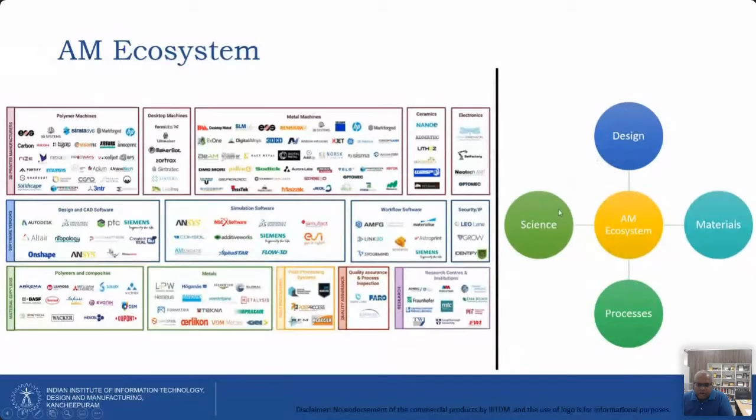Okay, so this is about additive manufacturing. I told about my institute, and then what I do, and then in general what the world is doing and what the commercial things and universities are doing, and then what the research ecosystem is and what the commercial ecosystem is.

Now, so we are changing gears. I want to tell you a bit about the fourth industrial revolution, and then go back to additive manufacturing and design for additive manufacturing in detail.

Okay, so now I think I should read this quote, which I use largely in many lectures, which is called 'adapt or perish, now as ever, is nature's inexorable imperative.' What H.G. Wells tells us in this quote is, if you're not adapting to changing market conditions and changing technology, we may be doomed.

For example, when we studied, we had a planer and a shaper, which are typically non-rotating workpiece and non-rotating tools, so they come into the group 4 category of machine tools. Now they are extinct, I would say, because none of the workshops have them - if they are not adapting to new modern technology like CNCs, turn-mill centers, and CNC controlled forming equipment. So you see this guy is sleeping here, because he is not able to adapt, and he has lost all the jobs because he has not modernized his plant, and has not looked at capacity building or moving to what the industry needs.

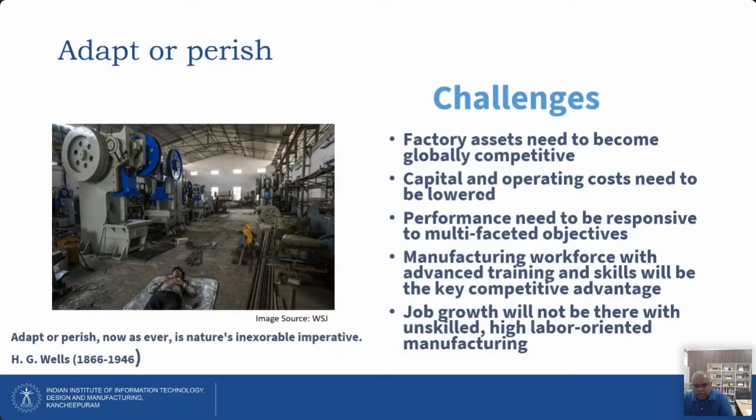As I said, the factory assets have become extremely important to be competitive, so it's become globally competitive. Chinese manufacturers are becoming extremely redundant right now because of COVID and other situations, so it becomes imperative for them to adopt fast-changing fields and things like that. These are some of the challenges. People are also looking at extremely lower cost and higher quality products at a reasonable time for them to develop and launch into the market. The Chinese are doing that extremely well, and we have to catch up with them - so the capital and operating cost needs to be lowered.

So Industry 4.0 actually helps many industries. If you put them in a 4-quadrant view, there are high potential industries - they could employ Industry 4.0 technologies and are positioned well for the future. And there are strong current bases, like very leading industries, GE, Siemens and Bosch. These companies are first movers, adopting fourth industrial revolution technology very quickly into manufacturing shop floors, the production process, the life cycle, and the supply chain. So they are able to come up with a really good amount of knowledge, skills, know-how, patents and technologies, so they can sell it to the worldwide market.

So they can export it to India and things like this. We are also trying to do a lot of things, but still we are at legacy systems. We are at very high risk for the future because we have a very strong current base, but the problem is we are only with the legacy systems. We are still trying to understand the micro aspects of the manufacturing process, and we are not yet ready to adapt to some of the things that actually need to be adapted.

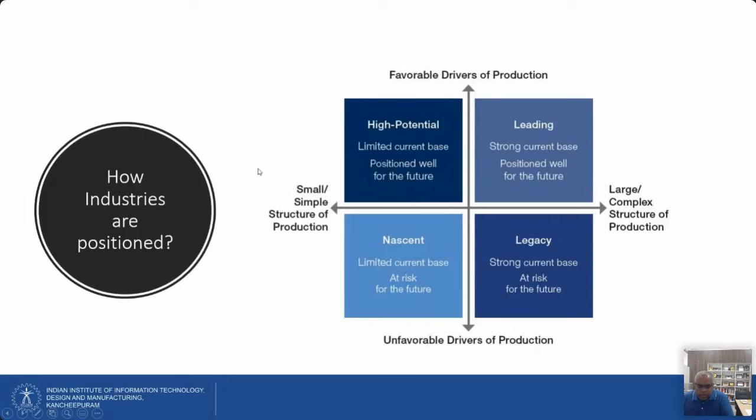So this is called the capability maturity model, to understand how industries are positioned. I quickly tell you about what is happening around the world in the fourth industrial revolution. So for example, look at manufacturing.

When I was working at NIST, which is the National Institute of Standards and Technology, around 2012-13 timeframe, that is when the Industry 4.0 document was released by the German government. It's spelled in a different way, INDUSTRIE, because it's a German-driven thing. The German Chancellor Angela Merkel announced the policy.

It's a German government policy to basically adopt a few technologies and then reach a convergence, so that they can achieve very high productivity and very low cost of operations, and also very high skilled labor can be done. So that's what they wanted basically.

The major reason or motivation for them to work on such a fourth industrial revolution is that they have a very aging population. That means they had a huge population who are somewhere in their 60s and 70s. They're not ready to work in the factories, so they have very high labor shortages. So they wanted very high automation in these factories.

Whereas countries like India, we have a very young population. Our demographics are very young. So we have a huge number of people who are jobless. We need to get them into jobs. But the problem is...

with the low skill jobs that we are generating, like Ubers, like Olas, and like Swiggy's, Zomatos, they are very low skilled, right? So we need to generate very high skilled jobs, because highly labor-oriented, low skilled jobs are not going to stay for long, right?

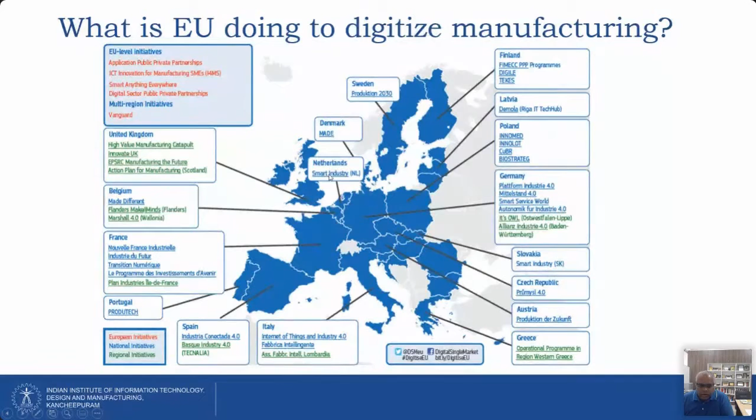So these are some of the other countries, like the European Union in general, and individually countries have separate things, like Demola and Produktion 2030, made in Denmark, and smart industry in Holland, and things like that. So you have a lot of things happening there.

So we call this a manufacturing renaissance, because I think there are some technologies which are called evolutionary, as they take 30 years of time to grow. For example, computers: the first computer was built in 1960, and now I think every home has at least 3 computers right now, as of now.

So on average, people have 3 computing devices in a home. Some homes don't have a computer, but still, on average, if I look at it, 3 computers, considering the mobile as a computing device.

So that is the growth. It has taken something like 60 years to evolve. But whereas some technologies are revolutionary, that means they progress at a much faster speed and faster adoption.

Like 3D printing, 30 years ago it was invented. Now if I look at US, every household wants to have one 3D printer in the home, and they want to personalize the manufacturing and make it distributed instead of making something in China, shipping it, storing it in warehouses, and distributing through logistics into retail stores to the customers. So what they want to do is make their own parts in their backyard. That has become one revolution in US. That's why it's called revolutionary, not evolutionary technology.

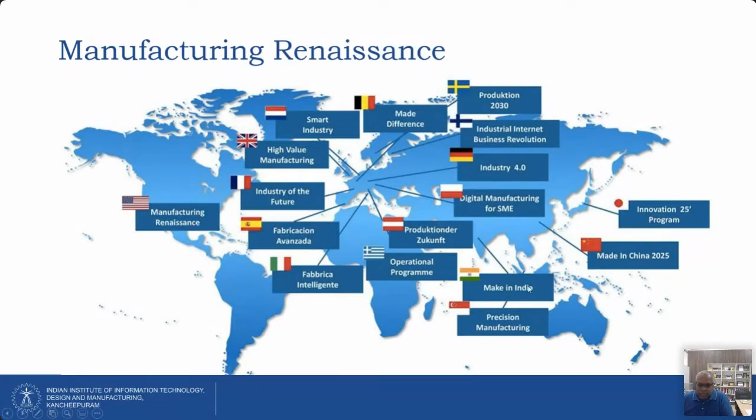So India is also doing a bit in Make in India and other things. But the problem with India is our manufacturing industry is extremely diverse. We have people making things in a small scale, extremely manual and laborious, like leather industry and cottage industries like potteries. And we also have moderate SMEs, like manual assemblies, and Ford and BMW which is completely manual.

But the problem is whether Industry 4.0 can be applied in all the industries in India. It's not going to be a viable solution. So we need some places to start somewhere in the first industrial revolution itself, then slowly move to the second industrial revolution, and then some places it's not even IT automated, so third industrial revolution, and then come to fourth industrial revolution. So we have all the industrial revolutions to reach.

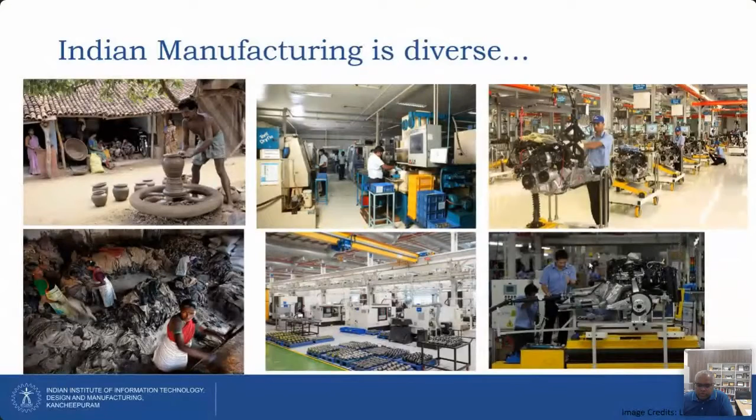So Internet of Things - I think many of you might be knowing what is IoT. I don't have to go in detail into all these platform technologies. Smart manufacturing or Industry 4.0 is nothing but the convergence of all these technologies, like advanced simulation. I'll tell the characteristics of this.

So what happens is there's a business driver. If I look at the adoption of Industry 4.0 in industries, because of plant-wide visibility and automation that is to be happening, there should also be a shift from reactive to predictive maintenance. So what is happening currently in most industries is they are using reactive maintenance strategies - don't fix it until it's broke. That's the policy they follow.

Now what is happening is you are able to instrument some sensors and then collect data and transmit it over network and put it in the cloud and use some analytical services to carry out data analytics and get meaningful actionable intelligence from the data, then use your wisdom and drive your production performance. So that's the kind of thing that Industry 4.0 envisions, right?

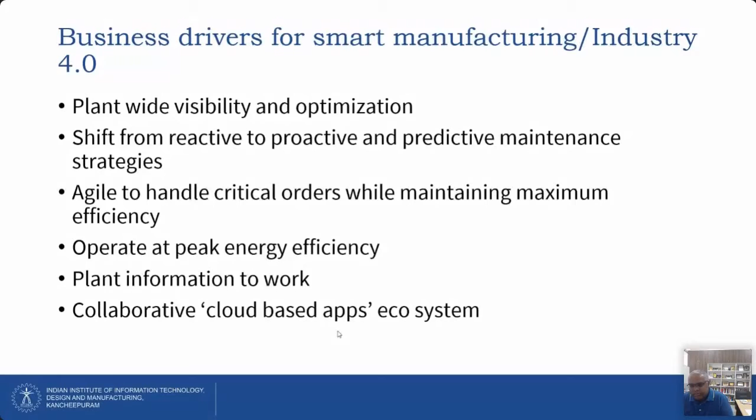And right now you have a lot of things available over cloud. Earlier you needed to have many things in-house. Now you can do many things through a cloud-based app ecosystem. So a lot of things can be servitized through cloud - either platform as a service, infrastructure as a service, software as a service, or machine as a service, things like that.

So this slide is where I'm going to explain the connection between 3D printing and Industry 4.0. What is the connection, and why is 3D printing becoming such an important technology? I have been talking about this for a while in many talks, and I'll try to explain it here in a detailed way.

So in the 1850s, as I was talking about, the first industrial revolution was about mechanization. People were trying to make craft productions - they have been making cars, ships, and planes. So what they were doing from 1850 to 1900s was initially making it in a craft stage - building a product, one piece at a time.

Then when the Ford Model T was launched, it was the first car to be mass produced. So what is mass production? I think you all know - it is about having a very high volume. Volume means the number of cars getting produced, or the quantity, you can say. So very high volume manufacturing.

So how do they achieve the volume? Through transfer lines - they have a moving transfer line. The line will be moving, and the workers have to assemble extremely fast so the product comes out. So in 7 minutes, a car can be manufactured - that's the total cycle time in the assembly shop. And that eliminated the need for craft production and things like that. But the problem is they've been using a lot of dies, like stamping dies, which are extremely expensive - the cost of the die is extremely high.

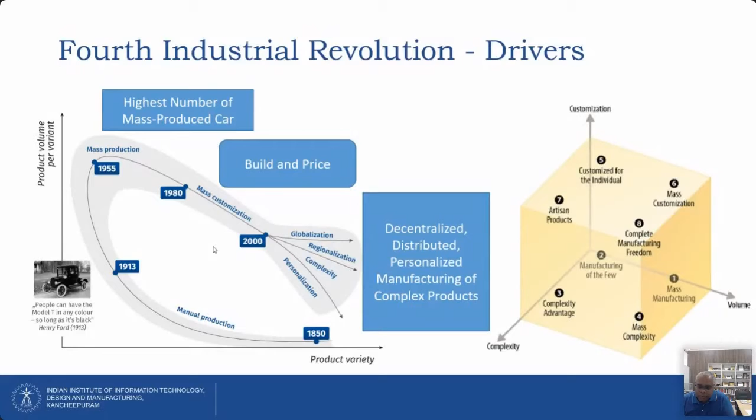But it has got its own challenges. In the title I said I'm going to discuss design opportunities and also challenges - I'm going to tell about the challenges towards the end. This is the one that I was trying to explain.

As I said, in additive manufacturing, the cost of manufacturing remains the same, irrespective of the complexity of the design. So let's say this is cost versus complexity - x-axis geometry complexity, y-axis cost. In conventional manufacturing like die casting, injection molding, machining, or even casting...

As the complexity of the part increases, sometimes the part cannot be withdrawn from the mold. You cannot have undercuts, you cannot have re-entrant features, and sometimes you have to give draft angles and maintain uniform wall thicknesses. Sometimes you need to maintain distance between features so it can be successfully die-cast. Conventional manufacturing technologies become extremely difficult when the complexity is slightly increased.

That's why designers use a principle called KISS - keep it simple, stupid. They want to keep everything simple. This problem is always there.

Like when you take any discipline in textile, the fashion designers may want so many things, but the textile engineer may not be able to produce that. Similarly, in civil engineering and architecture, architects want no beams, they want to make something so beautiful without beams, but you cannot support it. So people put beams here and there because structural engineers would find it extremely difficult to make it without them. So designers want a lot of freedom, but there are structural aspects, technical feasibility aspects, viability aspects, cost issues, which may restrict people who are in shop floor, manufacturing, builders, makers.

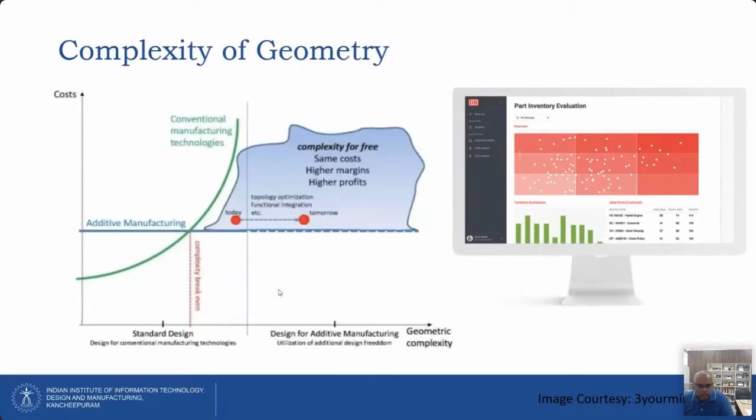Okay, so these are the tools and techniques. We have part consolidation, a technique where you take multiple parts and combine them into one part to take advantage of design simplification. And you also do lightweighting, where you introduce a lot of lattice structures so that you can lightweight the parts, because in many industries they want to cut cost as fuel cost increases, and there is pressure from government to increase fuel efficiency. So to make a car fuel efficient, you have to reduce its weight. One lightweighting strategy is to introduce lattice structures and do structural optimization for mobility solutions, especially automotives.

Heterogeneous modeling is about making multi-materials and gradient structures so that you can tailor functions in different regions, and also use generative design type principles to explore options. I'm going to show you, towards the end, an aerospace example of how you can use generative design. Generative design is an iterative process which gives you an optimized design, not just one solution, whereas in topology optimization you also optimize the material layout within a given design space, but you get only one solution. With generative design you get multiple solutions, and then you can optimize cost and other things based on those. You can also use artificial intelligence here; I will tell you about how people use deep generative networks and things like that.

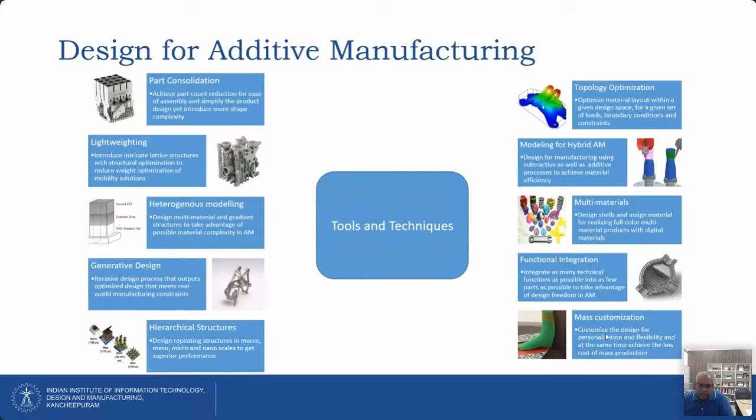For example, part consolidation, the first principle: you can take multiple parts that have too many fasteners and consolidate them into a bionic, bio-inspired design that's more nature-inspired and organic in shape. These designs are too complex to manufacture easily in conventional manufacturing, but in additive manufacturing it becomes much easier.

So that means you're using a divide and conquer approach. You take a very complex design and slice it, and when you slice it, you get layers of 2D contours. So essentially it's just 2D printing in the third dimension. Do you understand? That's why 3D printing itself is a misnomer. What people could simply call it is 2D printing in the third dimension. That is what's happening in many additive manufacturing processes.

Like this, you have sheet metal parts. You have to make a lot of these sheet metals and then microweld them together using ultrasonic welding, which is a painstakingly complex process. Instead, you can modify the design to make it one piece - these are called part consolidation.

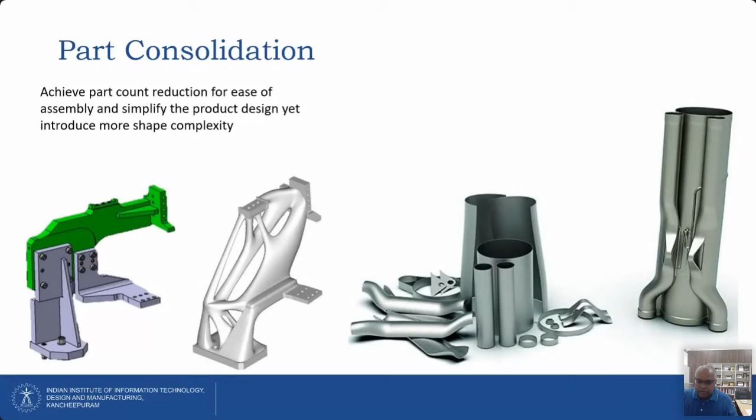But if you want to make a mold for this in conventional manufacturing, it would be extremely costly to make these shells. So what people normally do is put a plaster of Paris mold into the patient's ear. Let's say 100 patients come to an ENT specialist, so he can make 100 different designs customized to the individual patients.

Then overnight they can build these in powder bed fusion, a polymer machine. So 100 designs can be nested inside that build volume and made layer by layer at the same time, all of them different designs. You don't have to make 100 molds for 100 designs, isn't it? So that becomes extremely cheaper. This is what mass customization is about.

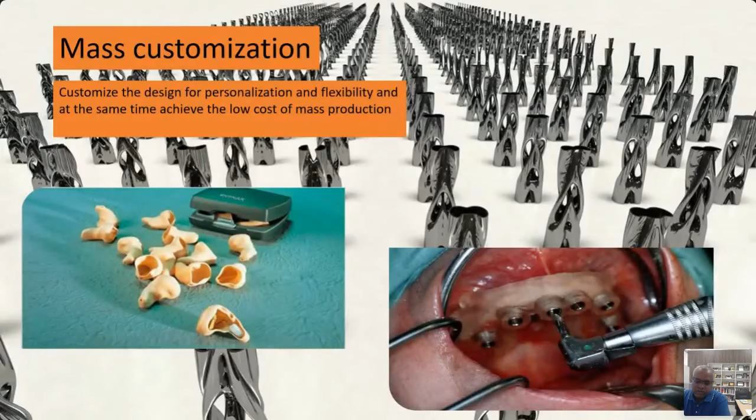So in this application you can make hundreds of the same varieties. This comes from medicine, and there are also applications in engineering which I haven't shown because it's very difficult to justify the cost. But there are some people who would like to spend money to get customized seats, customized parts, customized cars, customized mobile phone cases, and customized devices.

You can also tailor-make the structures, like having tailored porosities, bone-like structures. Internally you can have very high porous structures, and on the outer surface a very low porous structure, so that it mimics our bone. If you look at our bone, the cancellous bone, you can see the inner regions, like the marrow regions, are extremely porous, whereas when you move to the exterior surfaces it's extremely dense. So those kinds of properties you can actually model and then print.

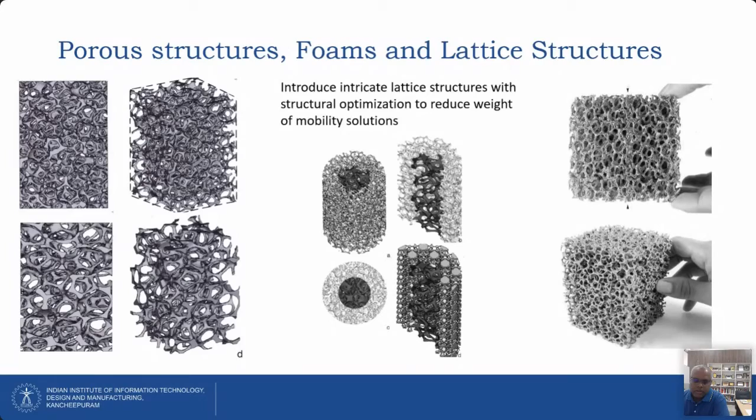This is ideally used in trucks, also earth movers, where you want to move the front arm or the back arm, the bucket excavators and things like that. So you want to control many things using one single hydraulic pump, and you may have to route that hydraulic flow into different cylinders - that's where you use a hydraulic manifold. These are typically large, heavy components. Now people are talking about efficiency, so they do a topology optimization.

They start with the design and eliminate the material which isn't doing this function. This has been designed in such a way because when people use a drilling machine, they can only drill straight holes - you cannot drill an inclined hole in a milling machine. So you can only drill a hole which is straight.

So that means you need to have a very solid block where it doesn't have any inclined or curved holes. In additive manufacturing, you can have any curved shaped holes. Also, this entire block need not be machined, so that's why you can optimize it and come to this point where it can be readily manufactured.

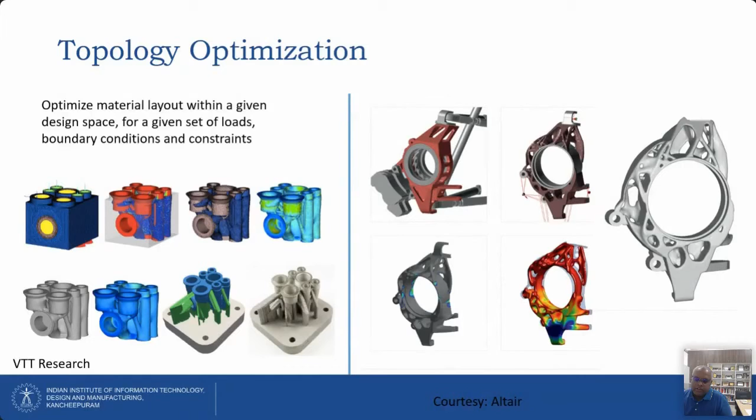So the steps are like this: you start with the frame like this, and then you optimize it. First, run an FEM simulation. You define a preserved geometry, design space, and apply the loads, and it will solve an FEM problem. Wherever your material needs to be kept, it will be kept there; other regions, material will be removed. These are the steps in topology optimization.

You can see here initially it has a lot of holes drilled on its surface just to do weight savings. So then you de-feature it, you remove those things which are already there for weight saving, because you're going to do a completely different paradigm of weight savings instead of just machining regions out through milling machines. These are circular pockets that were machined on a milling machine to reduce weight, but here you de-feature them and give them as an initial design.

There are some regions where the assembly has to happen, so you keep them as preserved regions. Other regions are to be optimized. Wherever the fasteners and joints are, you assign the materials and loads along them, generate the ideal shape, smooth it off using PolyNURBS, and then do a FEM check to see if it has minimum allowable deflections with the factor of safety you've chosen. And then finally you manufacture it.

This is extremely difficult to manufacture through conventional processes, but in an additive way you can actually make them. You can see the fasteners or connections are maintained, their geometries are preserved, but other geometries have been completely reorganized. And further, if you want to do weight reduction, you can also put lattice structures.

There is a software called Topology which actually does everything for you, there's a workflow. There's a software called Autodesk Fusion 360 which can do generative design modeling. There's software called Inspire or Altair which can do this. ANSYS also has it, Siemens has it. There are a lot of commercial companies which can actually do these things for you.

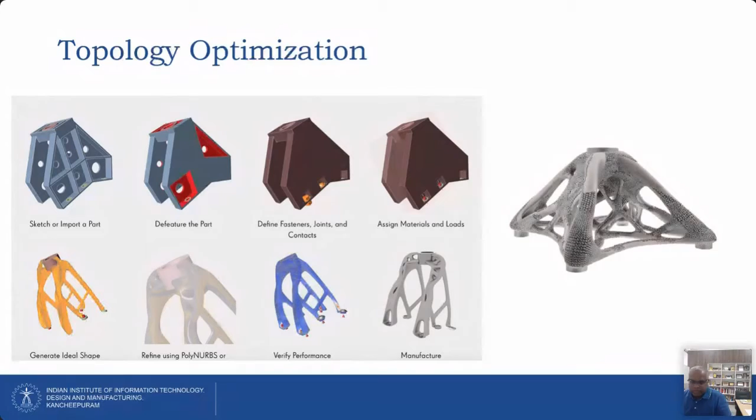So I'll show you another example called generative design. In generative design, you can start with an initial design, but the problem is how it differs from topology: in topology, you define the initial material layout. Instead, here I'm not going to define an initial material layout, but only define the preserved geometries and the negative geometry where I don't want the material to be. In topology optimization, I'm defining where I want the material to be; here I'm defining the negative region and the preserved regions, and also regions where I don't need my material to be put.

Then I define my loading condition. This example comes from GE, called the GE engine bracket. Usually I give a demonstration of the software with the help of my scholar if it's 2 sessions, but this is only 1 session, so today I may not be able to arrange a demo of the software tool. We can do that another time when we have the chance to demonstrate the software and how it actually works.

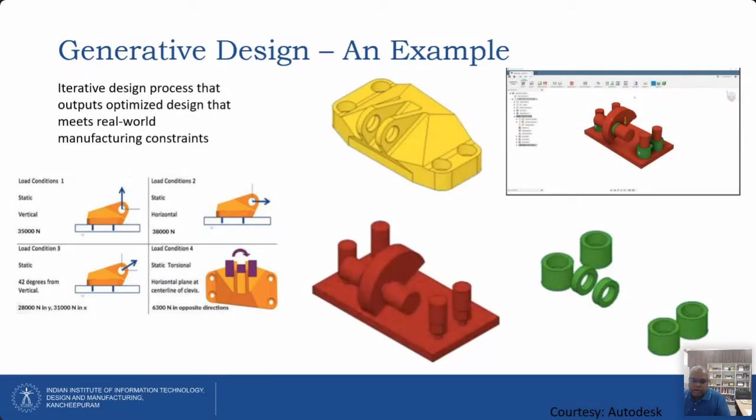So this is the output of the design. You can have multiple designs for the same GE engine bracket. You can see these regions are preserved, these are where the fasteners are. This is a GE engine bracket, where the engine is going to be mounted. This region is typically the negative region where I don't need to put material, and this is the preserved region. I've defined the preserved parts and the negative region, and then got results like this.

You can see multiple outputs like this. All these are typically called generative design outcomes. Each of the outcomes is extremely complex. You can use their visual similarities, like which ones look similar, and we have in fact developed an artificial intelligence-based decision support system to select one design among all the generative designs. So we defined different complexity metrics.

So this becomes an extremely easy way to find out one design. You can also use artificial intelligence and then define some optimization weight targets and other parameters to iterate on your own, and then optimize again and again and reach your target.

But you can also apply some constraints. For example, in additive manufacturing, one of the issues is support structures. As I said, additive manufacturing doesn't need tooling, but it still needs some support structure, which can be called tooling in the conventional sense. So what is this support structure? Suppose when you are trying to build some parts, if there are overhangs, you need a support structure to support those overhangs. So designing them, building them, and removing them is a painstaking process. Normally one would like to avoid these kinds of processes.

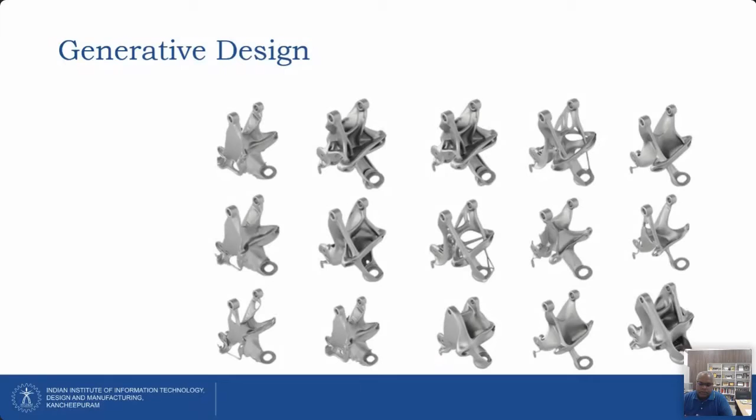So they need to optimize the design in such a way that it doesn't require any support. It optimizes surfaces which are only 45-degree angles. Steel and other materials can build up to a 30-degree angle without any overhangs, meaning overhangs can be built without any support, whereas in titanium it can go up to 45 degrees. So you can see that your applications could be looked at without actually building the support structures. That's the additional constraint you can impose, or a cost constraint - a lot of other things can be done.

Heterogeneous objects, in a sense, would be like having multiple properties and multiple materials at different spaces. You've probably heard about anisotropic - additive manufacturing is usually anisotropic, the build direction strength is always poorer than the XY direction where you're trying to build. Whereas heterogeneous means it varies with position. So you can have multiple properties, like in this example, it varies over position - the fiber content varies over position, and also strength varies over position.

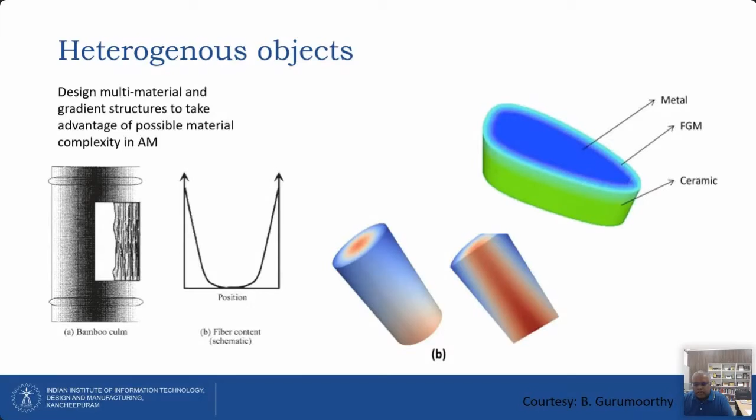And there's also a smooth transition from one material to another, called functionally gradient structures. You can use heterogeneous modeling principles in additive manufacturing if you use 2 nozzles of materials to deliver, or 2 filaments of materials, or 2 powder feeders. So what you can do is control the flow rates of the powders and control the nozzle or filament deposition rate, and then make a smooth transition between one material and the other.

For that, you need a CAD model to define it. For example, this is a CAD area - you have rail curves, and along the rail curves you can vary the process parameter. For example, let's say I want to make this a 2-material system in an FGM, a functionally gradient structure, which is called a compositionally heterogeneous material, and I want to vary the composition here. So the first material, M1, may have 100% copper, and this may be 100% nickel - so 3 material systems.

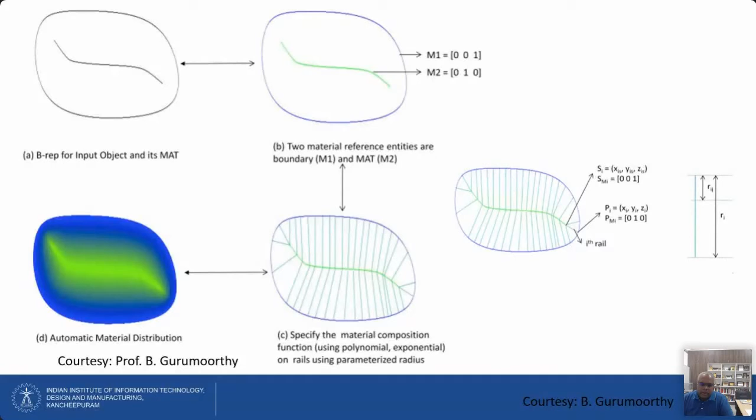So I want to vary this from 0 here. Along the rail curves, I can vary from 0 to 1 and parameterize those particular things - have 0.1, 0.2, 0.3, 0.4. So I can have 10 positions across every rail curve, and maybe have a medial axis transform at the center, and then make an automatic material distribution to create functionally gradient structures.

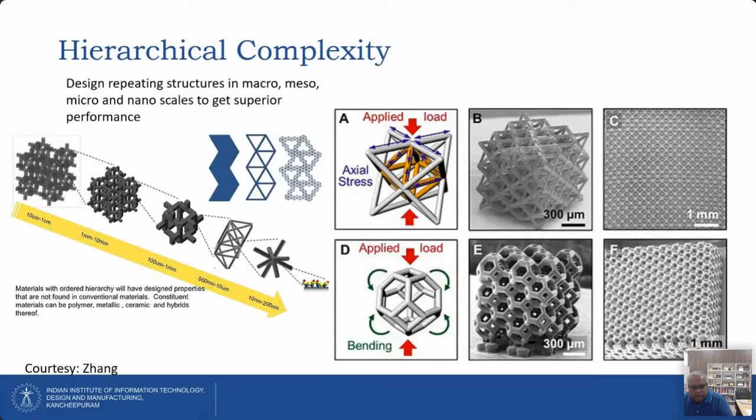The hierarchical complexity is about making structures at multiple scales which are repeating. So you can say this is a macro scale, then the meso scale, and the micro scale, and the nanoscale - down to sub-nano, atomic and molecular level. So you repeat the same structure so that it actually has superior performance and properties.

You can do this in multiple ways. You start with, let's say, designing repeating structures - starting with the octahedron, then an octahedron of octets, an octet of octahedron, then octets of octets. So you can repeat them at multiple scales - 0th order, 1st order, 2nd order, 3rd order - and get multiple structures. These complex structures can be very easily manufactured with additive manufacturing.

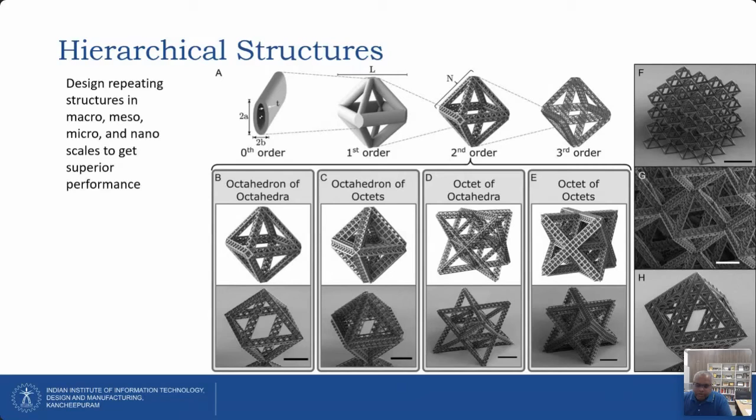Or else you can also use the same hierarchical structure by using rotation and mirror, or fractal cut. These methods are available commercially now.

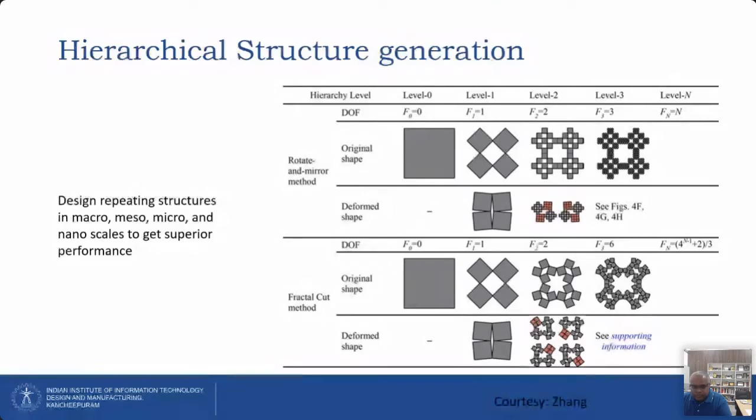As I said, multiple material systems, like you have a composition of nickel. You want nickel 100% at the outer side, and copper 100% at the center — a copper-nickel system. So you can have variation in composition across the radius.

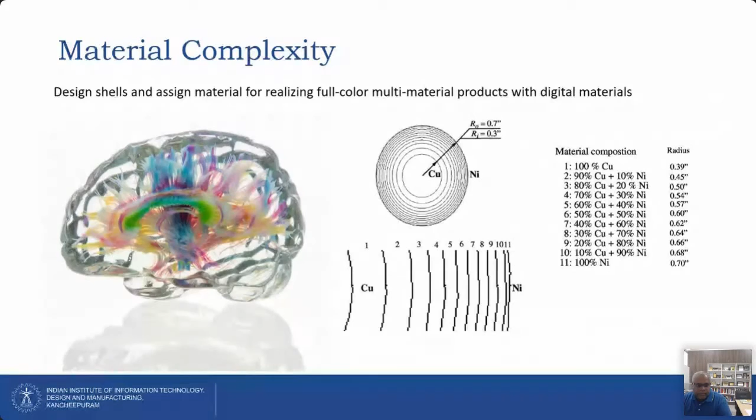Sir, just to let you know, I'm in a classroom, so I'll call you back, sir. Okay.

Okay, so that is the way forward, right? You have to basically combine multiple functions.

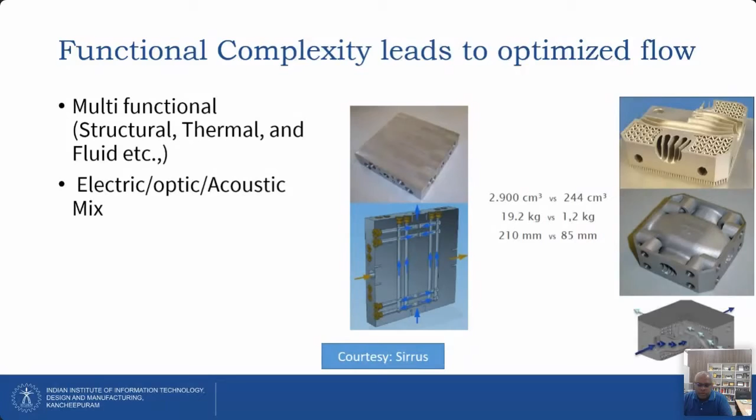You can also put multiple properties, like flame retardance and shock absorbing, or sometimes impact resistance — multiple functions in multiple regions, embedding things like lubrication together. So this is functional integration.

Earlier, this was a forged or cast part that people would normally machine for weight savings. But here you can topologically optimize the design, add lattice structures, and also add functional materials like antennas.

For IoT, let's say you have a turbine blade and you want to measure the pressure. You want to print three things on that sensor: a button, an antenna — an RFID antenna — a sensor which senses the pressure, and an energy supplying device.

Now, either you can print the batteries directly onto the surface as functional integration, or you can have an RF energy harvester printed on it, with two RF antennas. One antenna receives RF energy from a source next to it — like FASTag, where the RFID tag receives energy, harvests it from the transmitter, and sends data back through another receiver. Similarly, you can have an antenna printed on the part that harvests energy from a transmitter — low power or high power RF — and then sends the sensed data back, whatever you sensed, like the pressure.

So you have a sensing element, like wearable strain gauges — you've seen them measure things. There are many wearable devices now, flexible electronics, wearable electronics, which are typically printed and can be printed onto the functional part. This adds another functionality: the IoT functionality. That's what IoT is all about.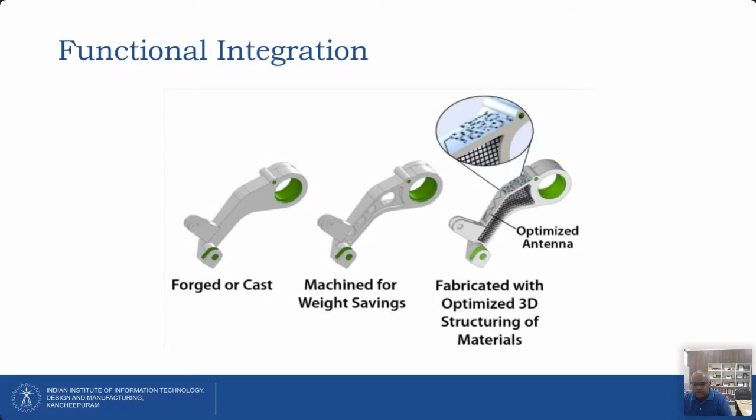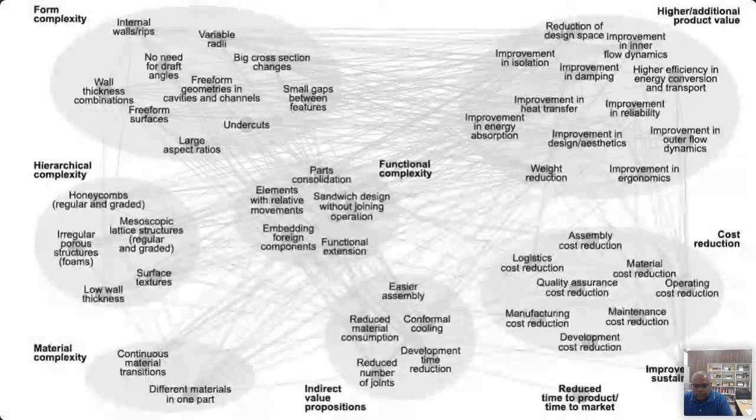So you have a lot of exemplary benefits, like reduction of design space, isolation from sound, improvement of heat transfer, conformal cooling channels, energy absorption, impact damping, vibration damping - you can actually make structures which are more damped. Reliability, because you improve the quality.

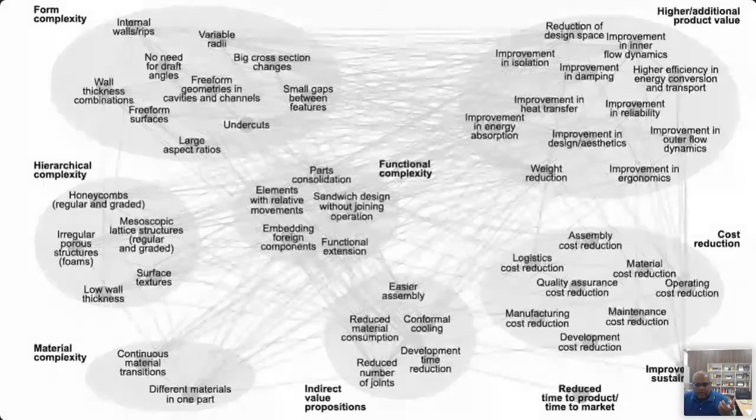Aesthetics - very complex shapes, lattice structures, weight reduction, and it's easy to hold. Ergonomics, like organic structures. Outer flow dynamics, aerodynamic, very free flow structures. High energy efficiency in conversion and transport, because of the energy efficiency. Inner flow dynamics, especially with complex cooling channels.

So you can see the exemplary benefits. And cost - many costs get reduced, and sustainability also gets improved. So these are the value propositions that you get in design for additive manufacturing.

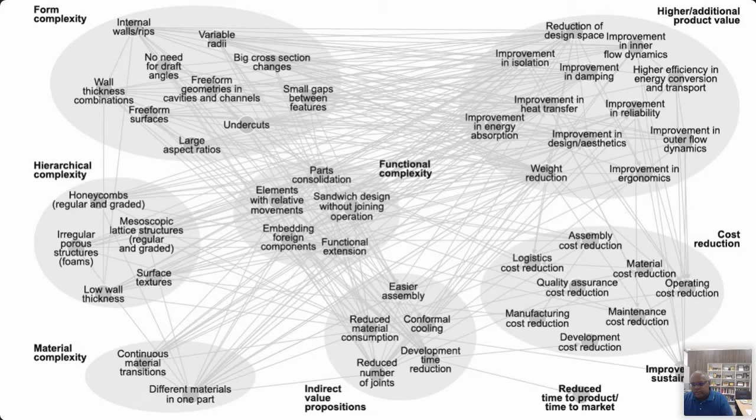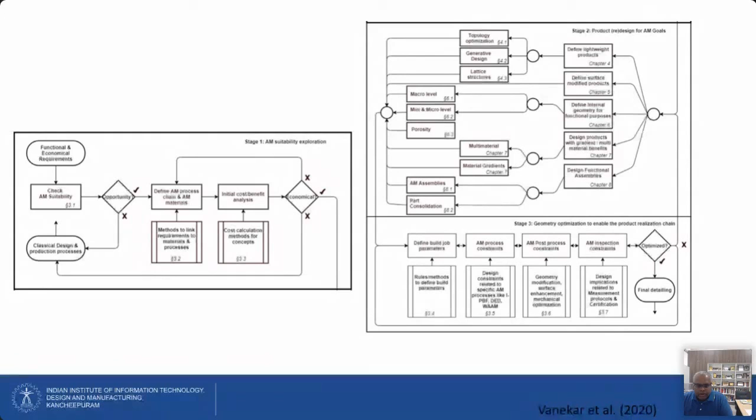They can put multiple materials and material gradient structures, FGMs and such, or eliminate AM assemblies and consolidate the parts together. So they get lightweight products, surface modified products, internal geometry modified products, aesthetic gradient products and functional assemblies.

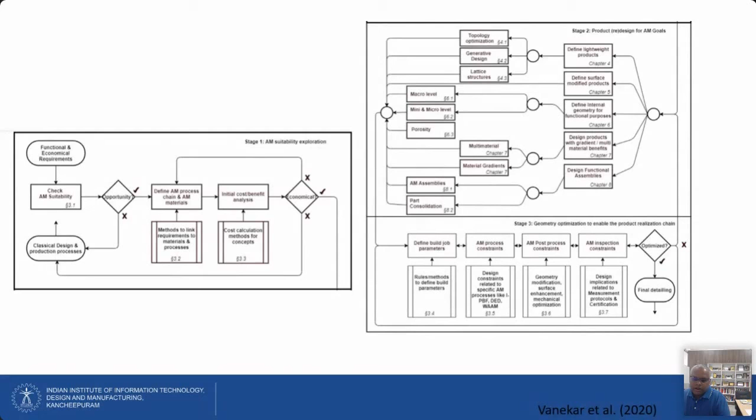And then they define the build parameters, AM related constraints like support structures and constraints in processes, and then process constraints like surface enhancements and inspection, and then optimize, and then go for final production. So I'll just show the enablers.

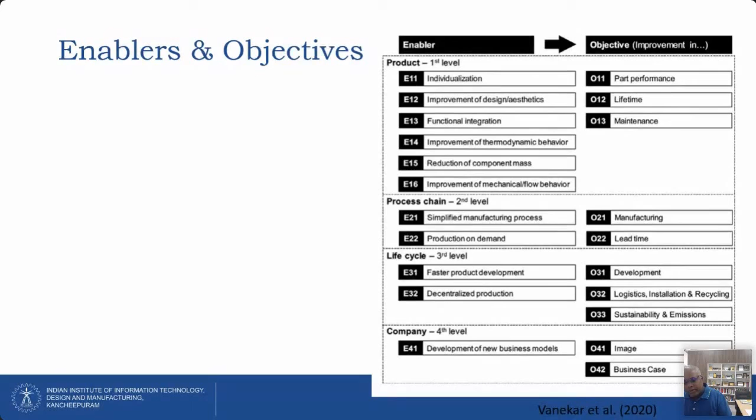As I said, you can do individualization, improve aesthetics, functional integration, thermodynamic behavior, mass reduction, mechanical behavior. Also have simplified manufacturing process and faster development. So you have a lot of objectives and improvements there.

So I'll just give you a very simple two-minute case study of how you can use something like a deep generative design framework, using deep learning algorithms, to basically iterate many designs.

For example, you gather a lot of previous designs and generate new designs by topology optimization, then filter out very similar designs. As I said, we use view similarity algorithms. We recently published a journal in the AM journal which talks about view similarity based algorithms.

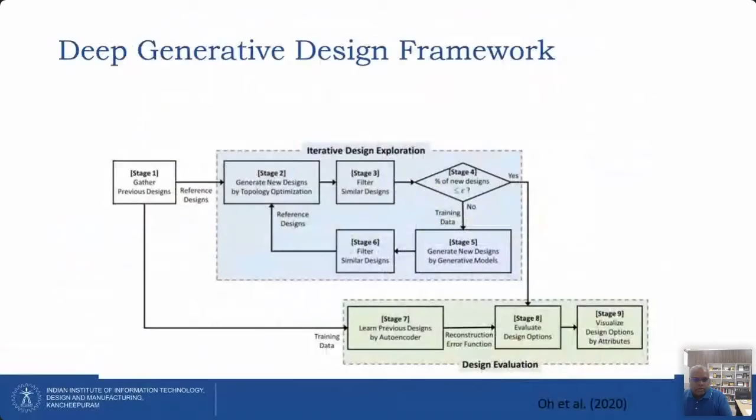Before I stop, I will tell you about the research gap. What are the research gaps, especially about Industry 4.0, not just related to 3D printing. In 3D printing, as I said, there is very active research going on right now.

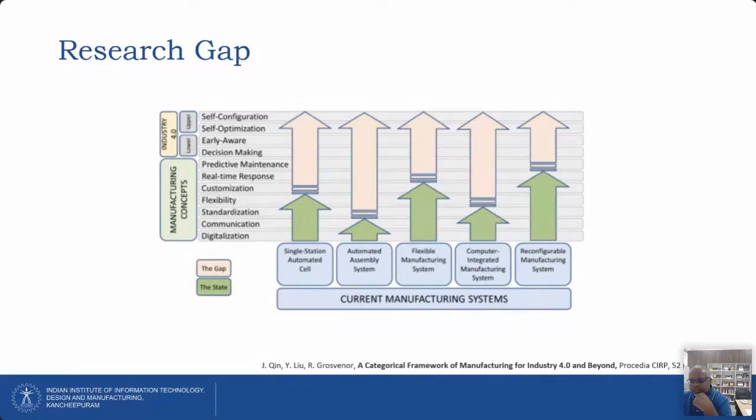For CIM, it is about flexibility. For reconfigurable systems, it's about predictive maintenance. These are the immediate gaps people identified and are working on for Industry 4.0. But ultimately, this is the vision for Industry 4.0: the goal is context-aware, context-sensitive, self-configuring and self-aware systems. These are things researchers want to push every system toward.

I want to acknowledge my team - these are my research students and masters students in my lab who have been contributing to my research. I have not presented much of their work here because many of them are still under publishing and copyright issues, so I used material that is generally available so we can put it on YouTube and other places.

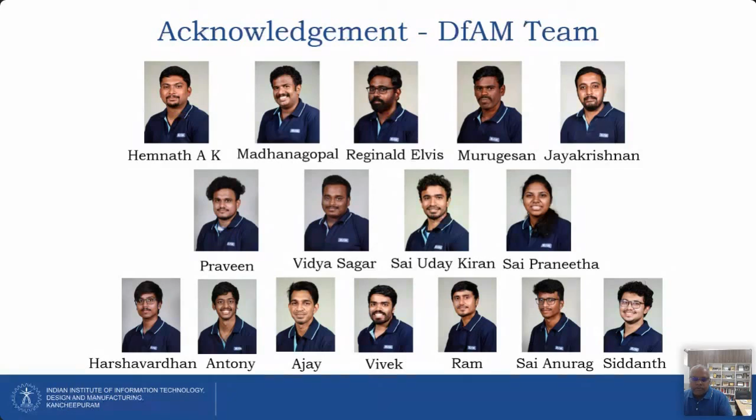We have a lot of published work which we cannot put on YouTube because AICTE ATAL recordings are usually posted there, and there are conflicts available. So I took materials which are freely distributable. Anyway, I'll share with them - we have face-to-face, in-person training programs, and I'll share much of that material.